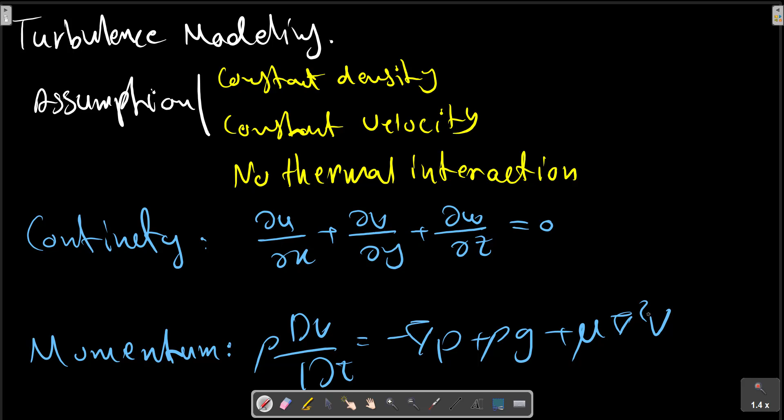Reynolds time average concept is a basic concept for turbulence modeling. For turbulence, let me write Reynolds time averaging concept.

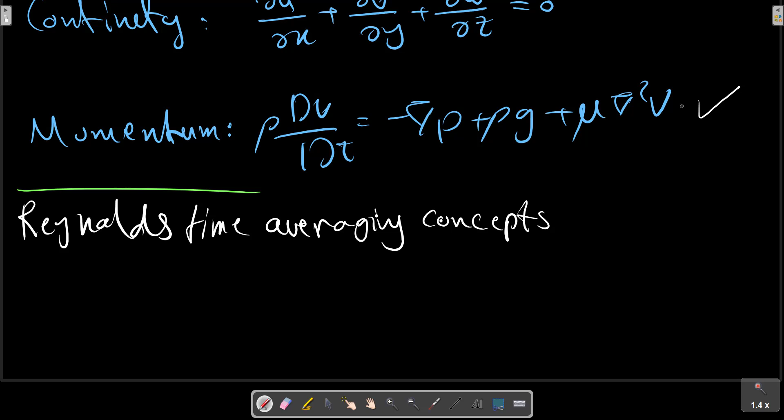For turbulent flow, because of the fluctuation, every velocity and pressure term in the continuity and momentum equations is a rapidly varying random function of time and space. At present, our mathematics cannot handle such instantaneous fluctuating variables. No single pair of random functions, V as a function of x and t, and P as a function of x and t, is known to be a solution to the equation of momentum.

Moreover, our attention as engineers is toward the average or mean values of velocity, pressure, shear stress, and drag in high Reynolds number flow. This approach led Osborne Reynolds in the 19th century to rewrite the equation of momentum in terms of mean or time-averaged turbulent variables.

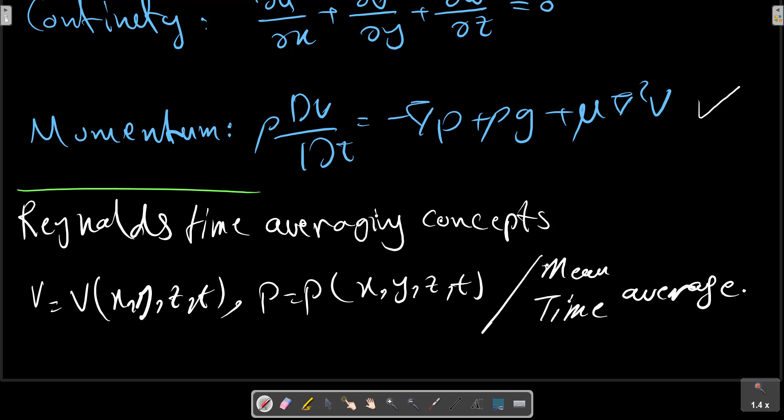The time mean u bar of a turbulent function is equal to the integral of u dt, where T is an averaging period taken to be longer than any significant period of the fluctuations themselves. Let me write it: an averaging period taken to be longer than any significant period of fluctuations themselves.

The mean values of turbulent velocity and pressure are illustrated in the figure. For turbulent gas and water flow, an averaging period T equals 5 seconds is usually quite adequate. T equals 5 seconds for turbulent gas and water flow.

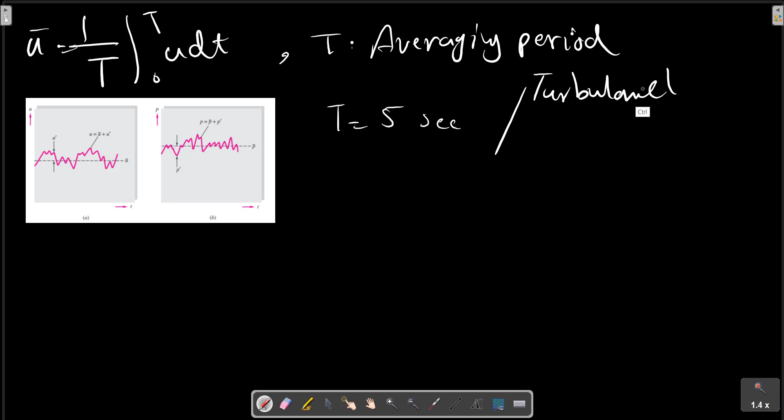The fluctuation u prime is defined as the deviation of u from its average value. We have a definition: deviation of u from its average value. Also shown in the picture. By definition, a fluctuation u prime has zero mean value.

Let me write u prime first, the deviation of velocity from its average, and we can calculate u prime bar, the mean value of u prime, equal to the integral of u minus u bar dt, which equals u bar minus u bar, which is equal to 0. So the mean value of the fluctuation u prime is 0.

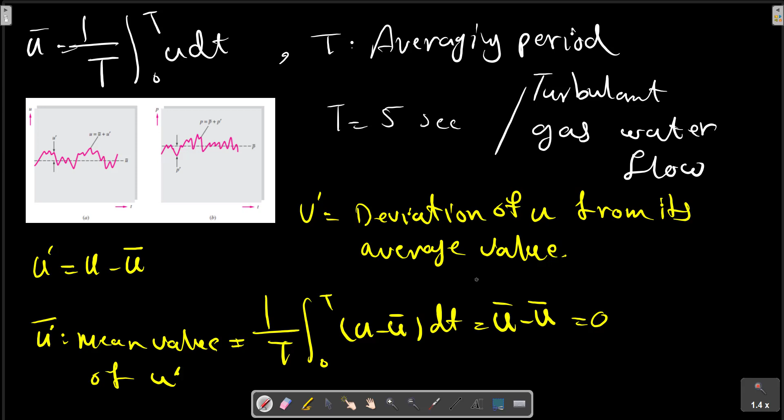However, the mean square of fluctuation is not 0 and is a measure of intensity of turbulence. So we can write a relation for intensity of turbulence: u prime squared bar, the integral of u prime squared dt, is not equal to 0. Nor in general are the mean fluctuation products such as u prime v prime bar 0 in a typical turbulent flow.

Reynolds' idea was to split each property into mean plus fluctuating variables. So we have the relation for the velocity component, which is the mean value of velocity plus the deviation of velocity from its mean value, and for the other directions we have the same relation.

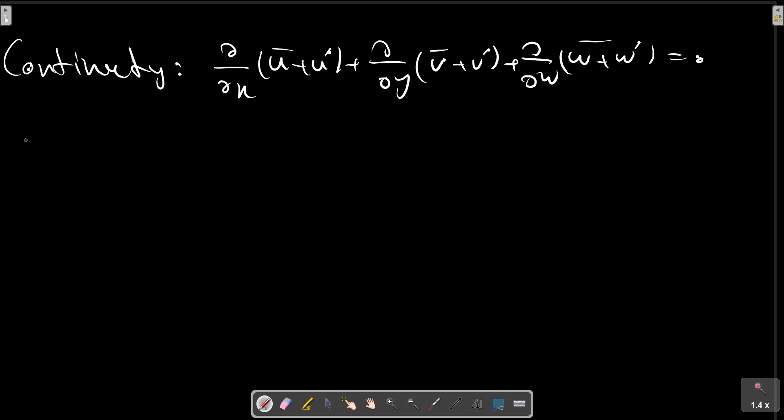So for continuity, replacing the average definition of velocities due to the average and deviation of the average quantities, we can obtain for continuity, and we have, thus we have the relation for, thus the deviation parts are 0.

We can obtain for continuity, and for the relation of momentum, replacing the continuity equation, we can obtain these relations, for example x direction: the pressure average gradient plus the force due to gravity and the force due to viscosity.

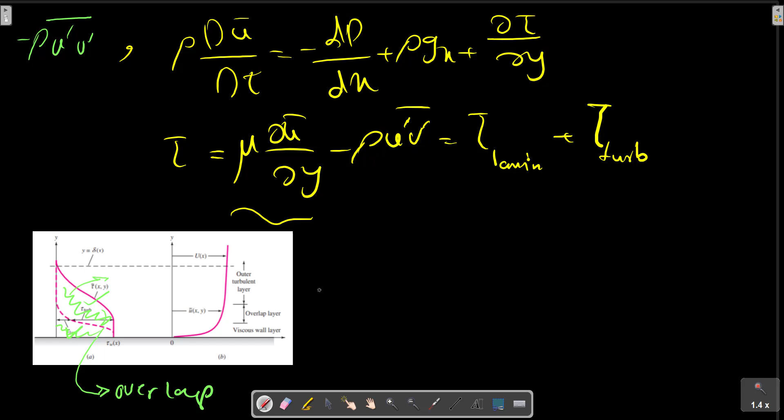In the outer layer, turbulent shear stress is 2 or 3 orders of magnitude greater than tau laminar, and vice versa in the wall layer. This experimental fact enables us to use a crude but very effective model for the velocity distribution across a turbulent wall layer, the logarithmic overlap law. The next subsection is the logarithmic overlap law. Let me write, the logarithmic overlap law.

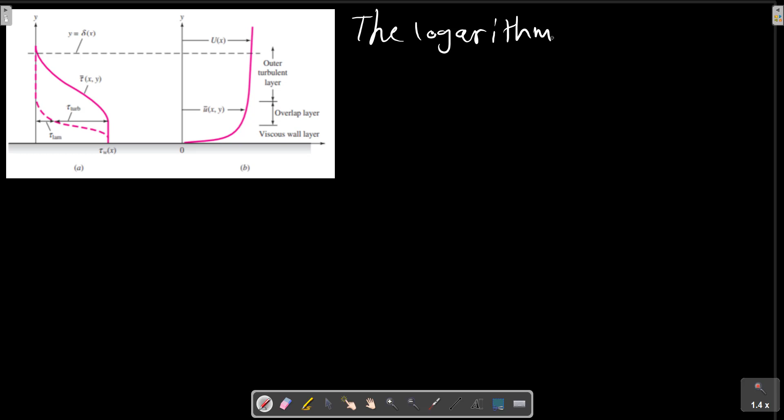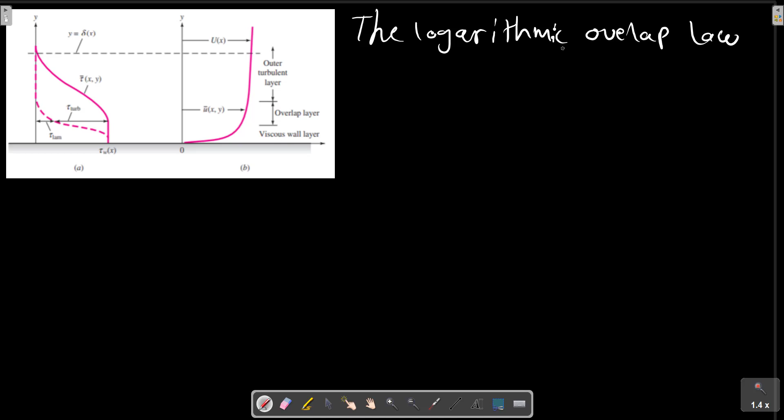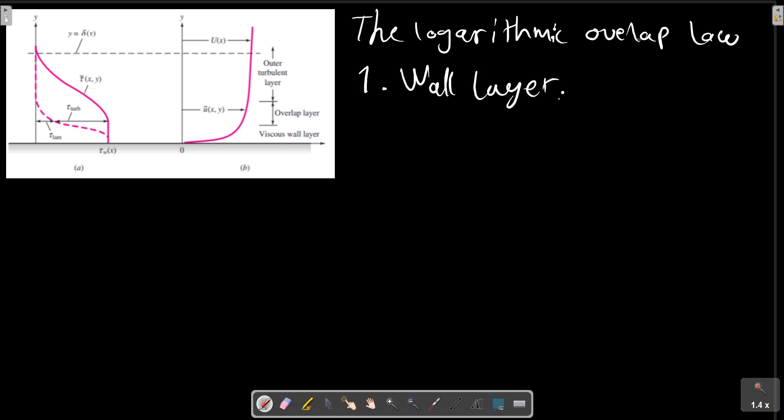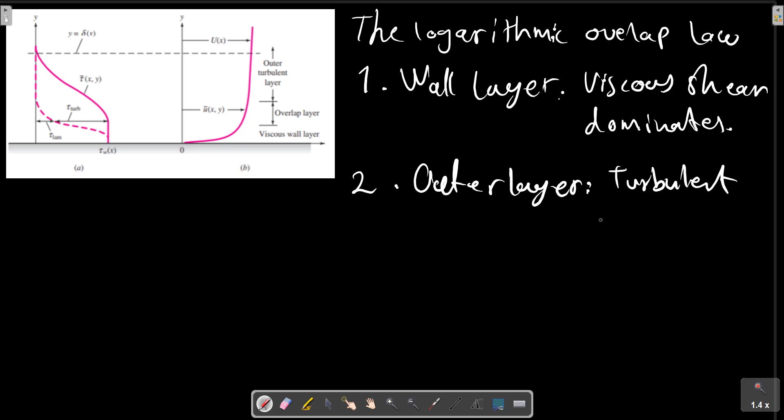We have seen in this picture that there are 3 regions in turbulent flow near a wall. The first one is the wall layer, viscous shear dominates. Second, outer layer, turbulent shear dominates. And 3 is the overlap layer, both types of shear are important.

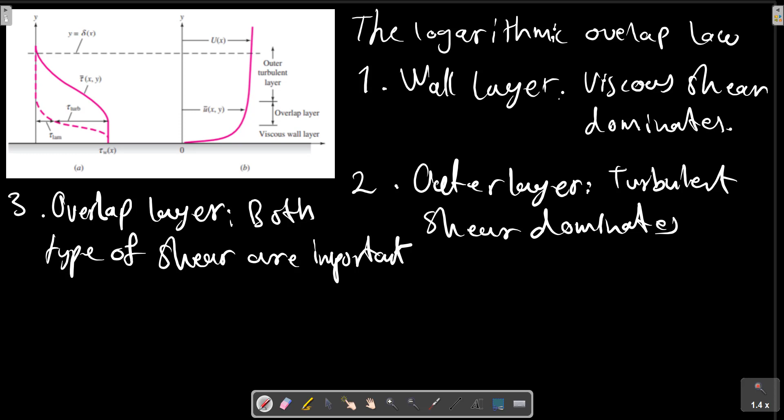From now on, let us agree to drop the overbar from velocity u bar. Let tau w be the wall shear stress, and delta and U represent the thickness and velocity at the edge of the outer layer.

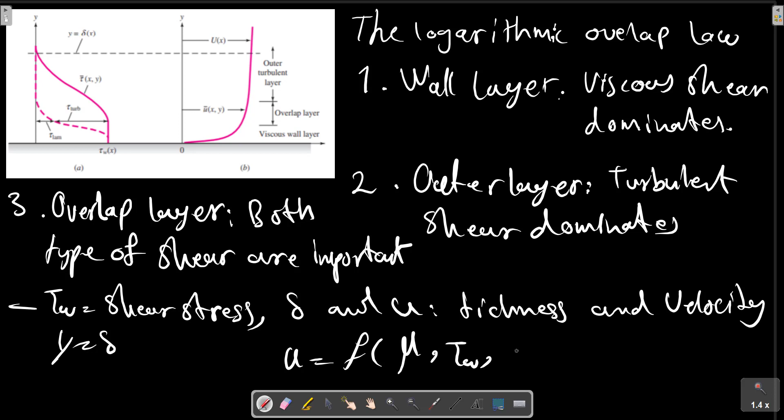For the wall layer, Prandtl deduced that u must be independent of the shear layer thickness, so we have the relation u as a function of wall shear stress, rho, mu and y. With dimensional analysis, this is equivalent to u plus, and u star equals to the square root of tau w over rho. This equation is called the law of the wall.

And the quantity u star is called the friction velocity because it has dimensions of velocity, although it is not actually a flow velocity. Subsequently,

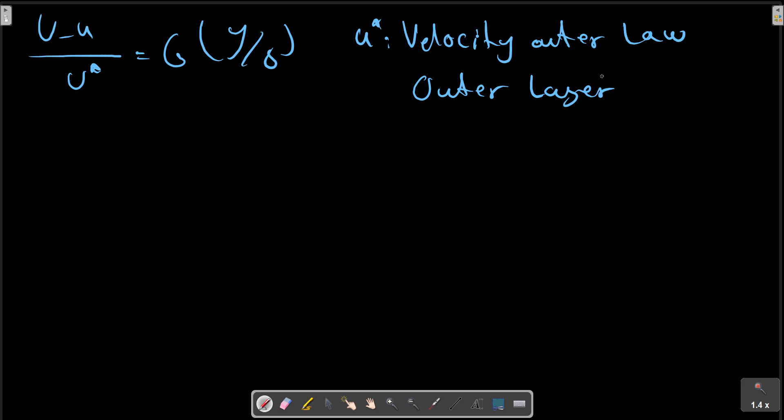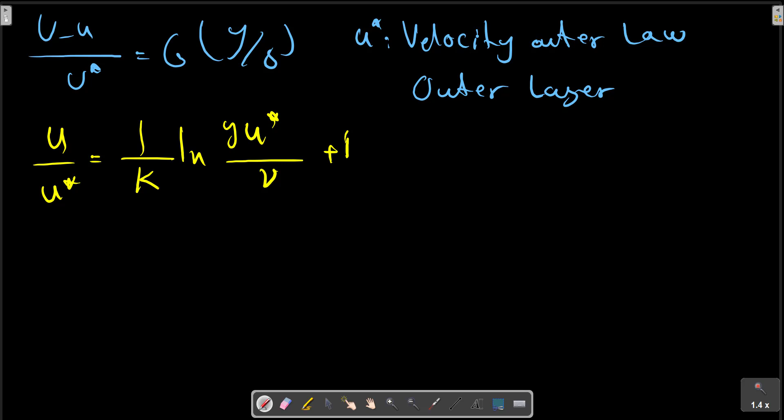For the outer layer, both the wall and the defect law are found to be accurate for a wide variety of experimental turbulent duct and boundary layer flows. They are different in form, yet they must overlap smoothly in the intermediate layer. Previously, Millikan showed that this can be true only if the overlap layer velocity varies logarithmically with y, with the relation of u over u star equals 1 over k ln of y u star over nu, plus b, for the overlap layer.

Over the full range of turbulent smooth wall flows, the dimensionless constants k and b are found to have the approximate values k approximately equal to 0.41 and b approximately 5. This is called the logarithmic overlap layer. Let me write logarithmic overlap layer.

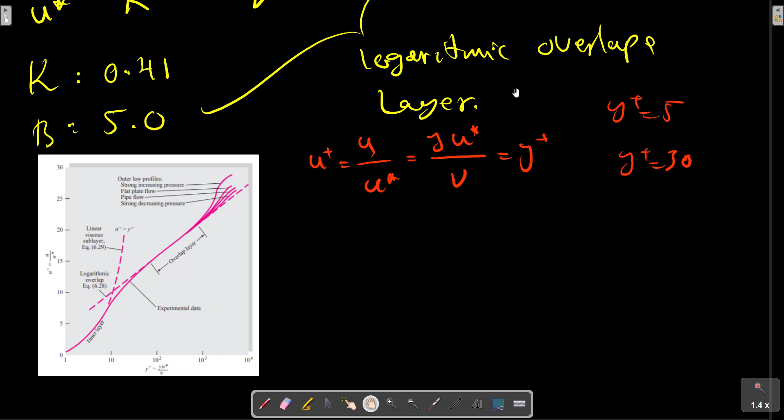The logarithmic law, instead of just being a short overlapping link, actually approximates nearly the entire velocity profile, except for the outer law when the pressure is increasing strongly downstream. The inner wall law typically extends over less than 2% of the profile and can be neglected. Thus, we can use the equation of the logarithmic overlap layer, shown here, as an excellent approximation to solve nearly every turbulent flow problem presented in this and the next chapter. Many additional applications are also available in various references.

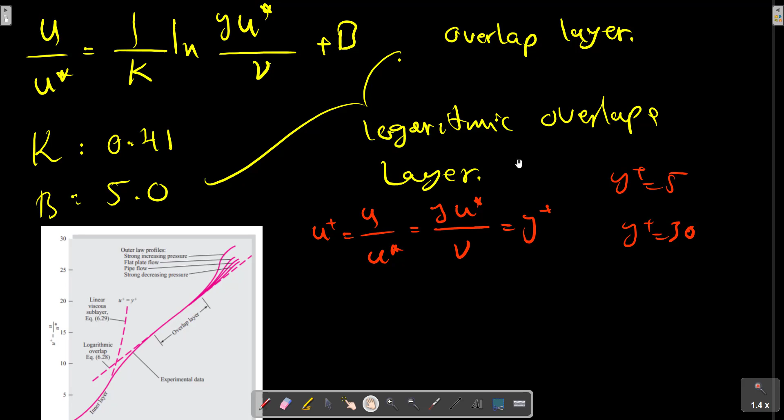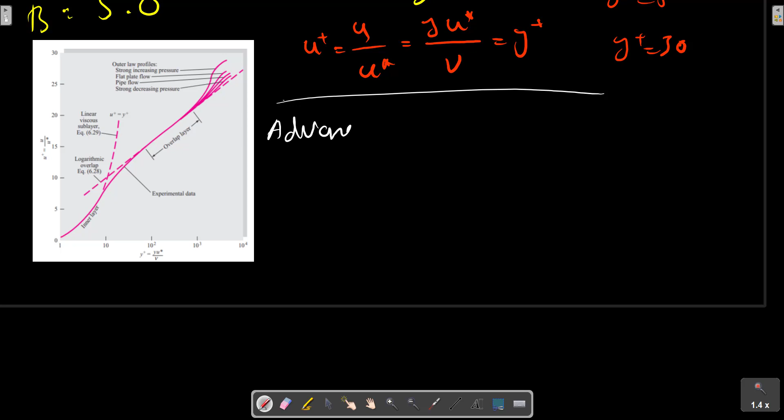Advanced modeling concepts. The next section is, let me write here, advanced modeling concepts. Turbulence modeling is a very active field. Scores of papers have been published to more accurately simulate the turbulent stresses and their y and z components. This research, now available in advanced texts, goes well beyond the present book, which is confined to the use of the logarithmic law.

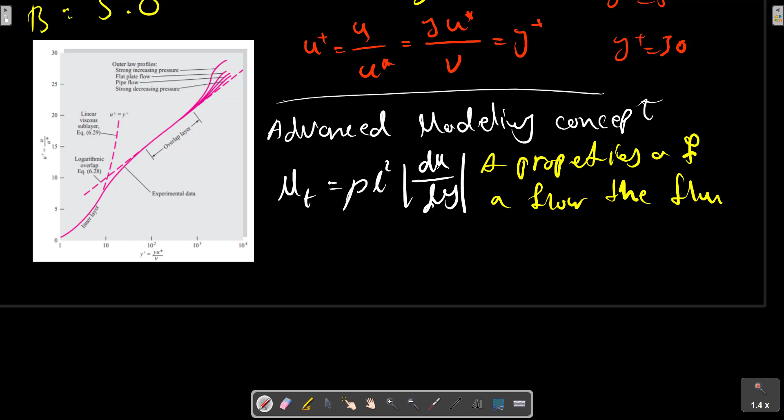For pipe and boundary layer problems, for example, Prandtl, who invented boundary layer theory, later proposed an eddy viscosity model for the Reynolds stress term. In this equation, the viscosity due to turbulence, mu t, equals rho L squared times the absolute value of du over dy. The term mu t is a property of the flow, not the fluid. Let me write: a property of the flow, not the fluid, and it is called the eddy viscosity.

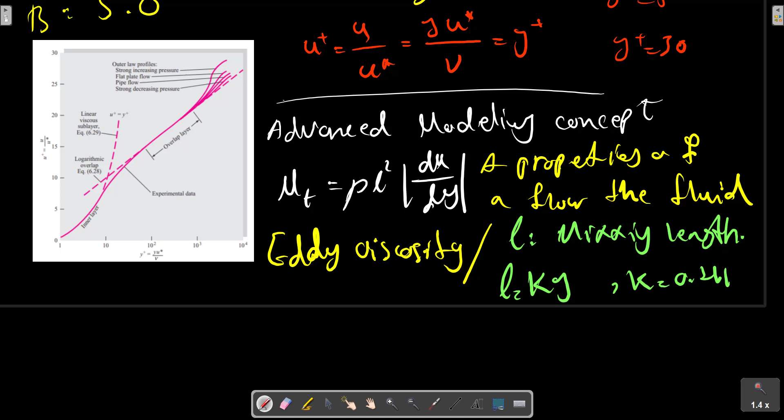And it can be modeled in various ways. A popular model is this, where L is called the mixing length of the turbulent eddies. Near a solid wall, L is approximately proportional to the distance from the wall and suggested as L equals k y, where k is the constant as said before, as a relation for the advanced modeling concept. There are some solved problems related to the turbulence modeling section, especially for the equation of the logarithmic overlap layer.